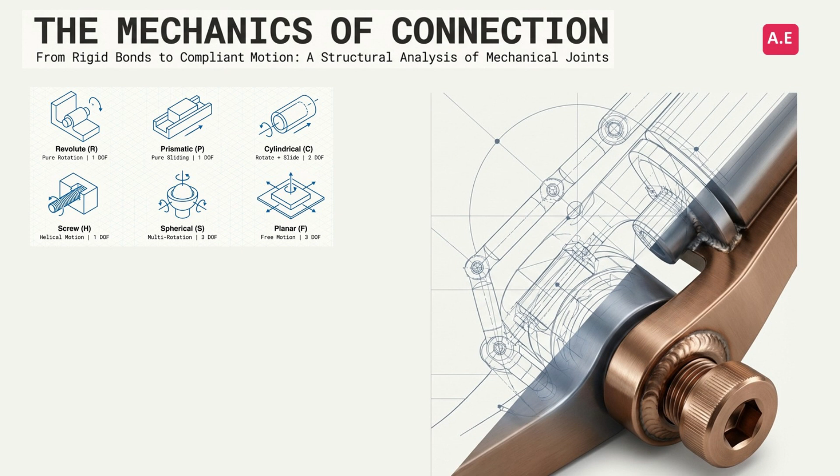I want you to think of it like the ultimate Lego set. Seriously, no matter how big or intimidating a machine looks, you can almost always break it down into just 4 fundamental building blocks. Once you master these 4 concepts, you've basically got the blueprint for almost every machine out there.

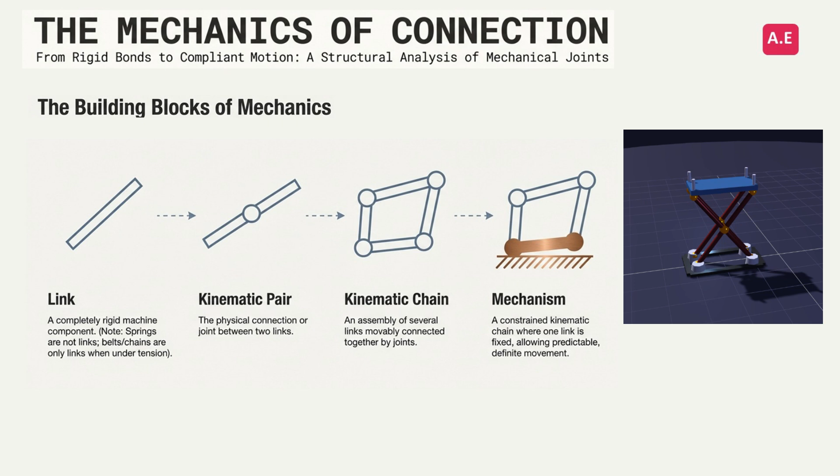Alright, so here they are, our 4 foundational pieces. We start with a single part called a link. Then we connect 2 of them together, and that creates what's called a kinematic pair. You string a few of those together, and now you've got a kinematic chain. And for the final step, you anchor that chain, and boom, you've got a mechanism. Let's dig into each one.

Okay, so you've got your links. Now you've got to connect them. That connection point, that joint, that's a kinematic pair. It could be a hinge, it could be a sliding track. Whatever it is, it's the click that connects our Lego blocks together.

Now we are getting somewhere. Once you start connecting multiple links in pairs, you create a kinematic chain. And this is where it gets fun, because now you have a whole assembly of parts that can actually move and flex and interact with each other.

But here's the absolute key, the secret sauce: a floppy, wobbly chain isn't a useful machine. To make it do something predictable, you have to fix one of those links to something solid, like a frame. The moment you do that, it becomes a mechanism. By locking down just one part, the motion of everything else becomes controlled, predictable, and useful.

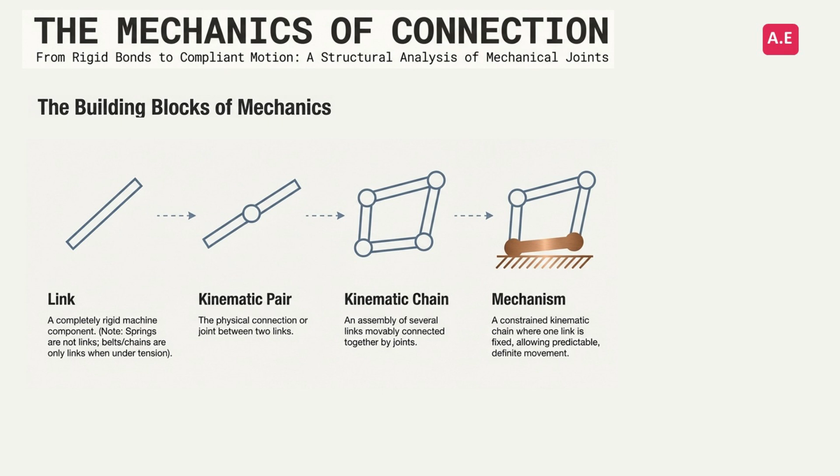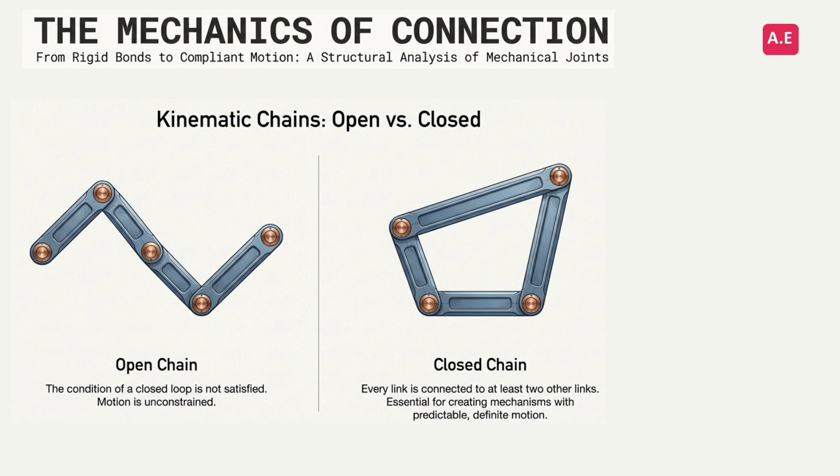Okay, so we've established that joints are how we connect our links. But the story gets a whole lot deeper, because the type of joint you use is what really defines what a machine can do. So let's dive into the different kinds of joints.

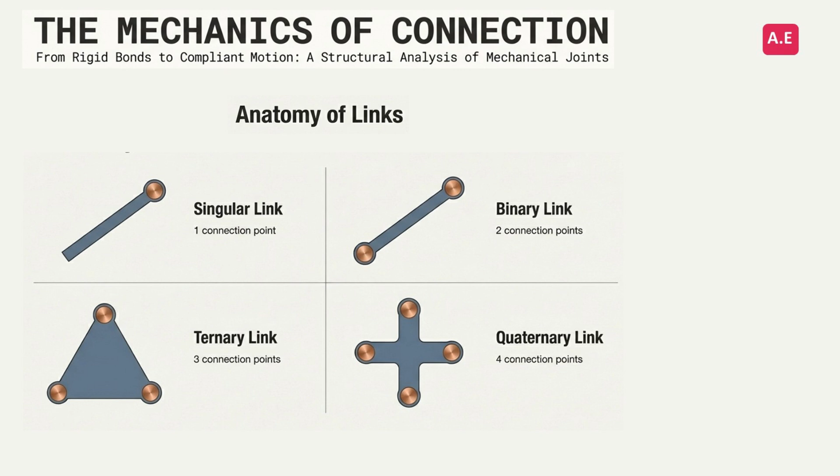You know, engineers love to categorize things. It helps them make sense of the world. And they classify these joints, these kinematic pairs, in 3 main ways. First, by how the parts actually touch each other. Second, by what's holding them together. And third, by the kind of movement they allow.

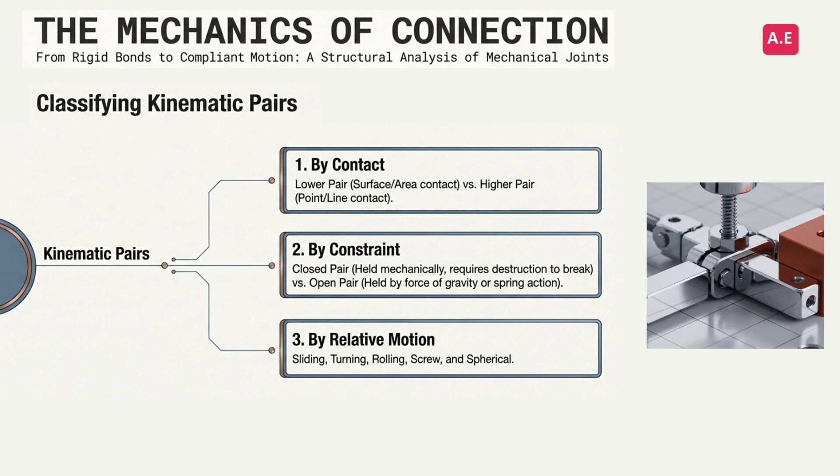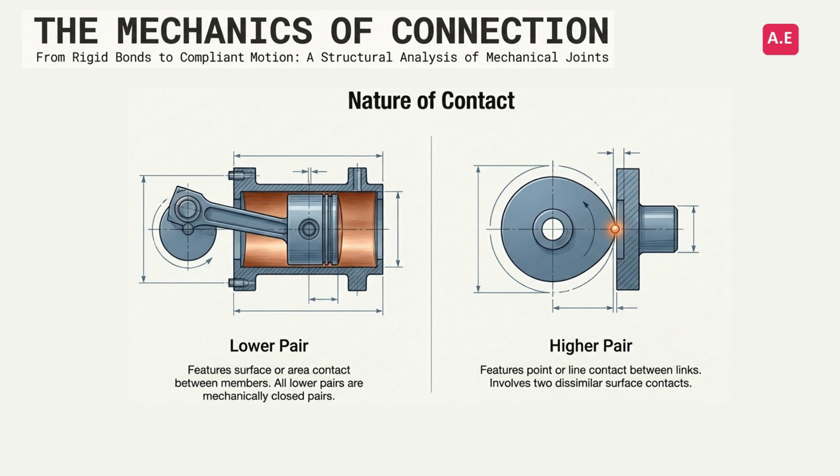Let's start with contact. You've got what's called a lower pair, where there's a big surface area touching, like a piston inside a cylinder. These are the workhorses, fantastic for handling big forces. Then you have a higher pair, where the contact is just a tiny point or a line, like a wheel rolling on a track. These are great for more precise, delicate movements.

Now let's meet the big 6, the fundamental types of lower pairs. The first 3 are the simplest because they only allow one kind of movement, or one degree of freedom. You've got the revolute pair, that's just a simple hinge like on your door. Then the prismatic pair, which is the sliding motion of a drawer. And the screw pair, you know, a nut and a bolt turning rotation into forward motion.

The other 3 lower pairs are a bit more multi-talented. A cylindrical pair can both spin and slide along an axis. A spherical pair, that's a ball and socket joint just like in your shoulder, giving you a huge range of rotation. And a planar pair lets an object slide around freely on a surface, kind of like an air hockey puck.

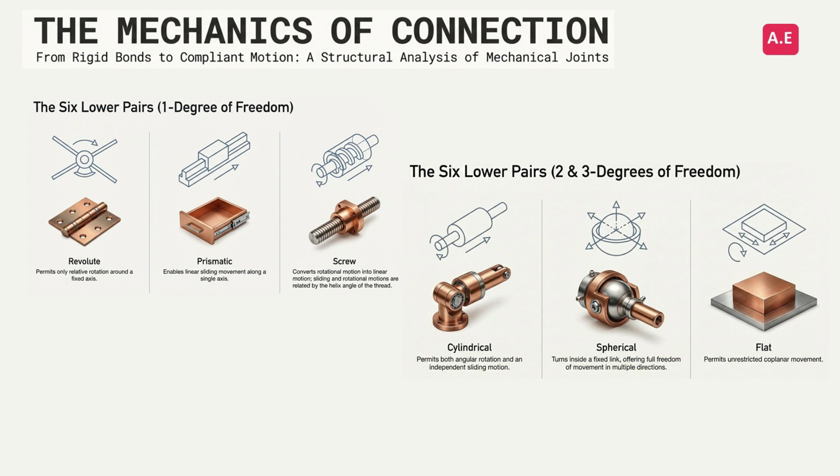So up until now, we've been in the clean, perfect world of theory and geometry. But it's time to get our hands dirty. How do we take these elegant ideas and actually build them in the real world? This is where the blueprint meets the bolt. This leads to one of the most fundamental questions in engineering.

Okay, you've designed this perfect motion on your computer, but how are you physically going to fasten all the pieces together? And more importantly, do you need it to stay together forever, or do you need to be able to take it apart later for repairs?

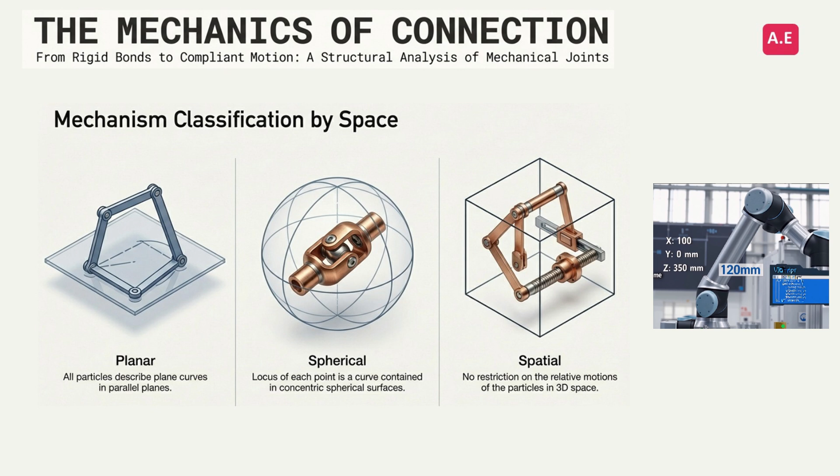On one side of that question, you have permanent joints. Think of a welder fusing steel beams together for a bridge, or rivets holding the skin of an airplane on. These joints are built for one thing: strength and permanence. They are designed to never, ever come apart. And if you try, you're going to have to break them.

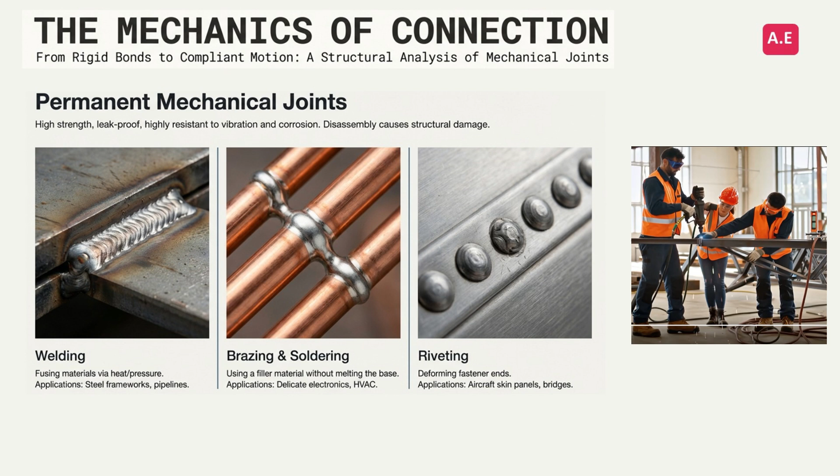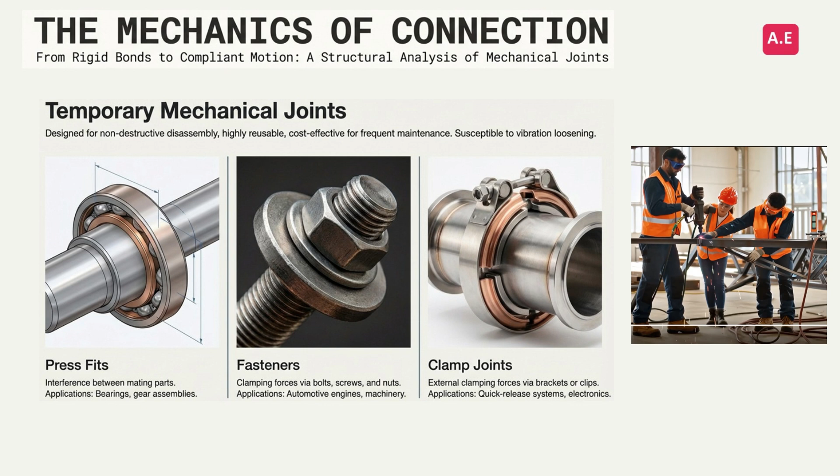But on the other side, you have the clever alternative: temporary joints. We're talking about all the nuts, bolts, screws, and clamps in the world. Their entire purpose is to hold things together securely, but also to be taken apart without damaging anything. This is absolutely essential for anything that needs maintenance, like a car engine.

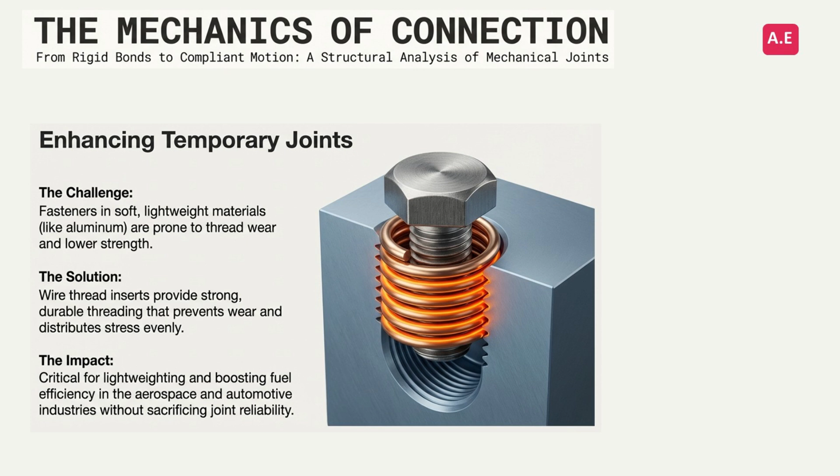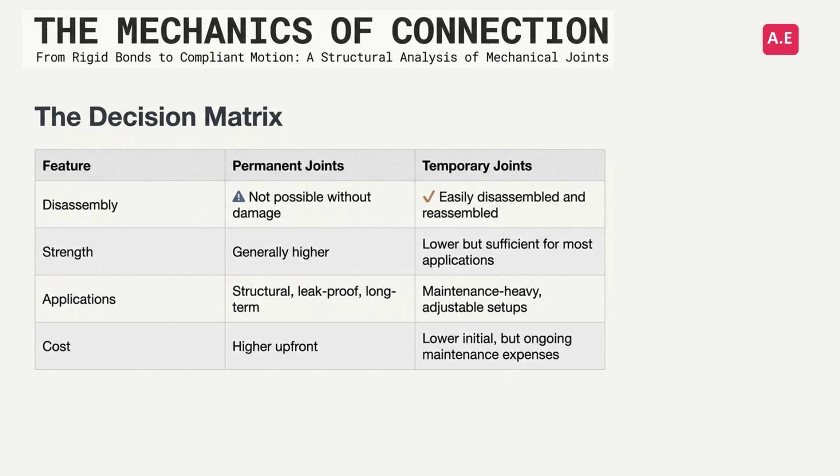And this table really just sums it all up. Permanent joints give you incredible strength, but you sacrifice serviceability. Temporary joints give you all the flexibility you need for repairs, but they might not be as strong or as cheap. It's that classic engineering trade-off that designers have to weigh every single day.

So now let's zoom all the way out. Let's see how all of these pieces we've talked about, from the simplest theoretical idea to the most practical real-world choice, come together to form this amazing engineering ecosystem. And here it is, the circle of life for machines.

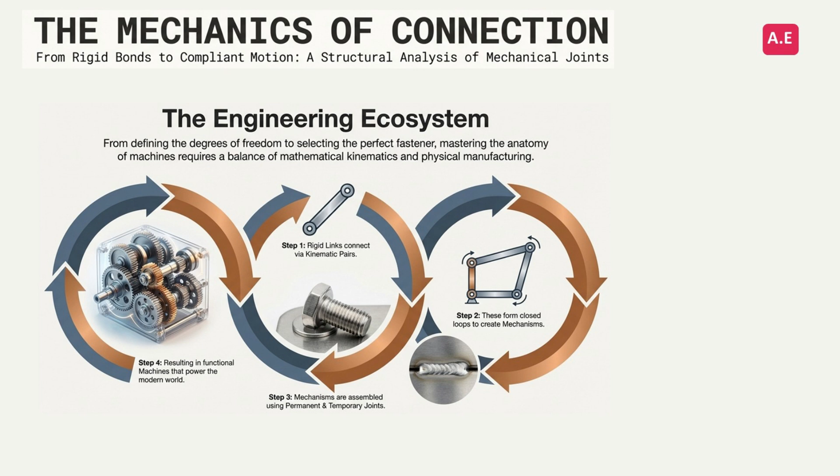You start with the simplest concept, a rigid link. You connect them with kinematic pairs. You assemble those into predictable mechanisms. And then, using real-world permanent or temporary joints, you build those mechanisms into the incredible functional machines that power our entire world. It all flows together.